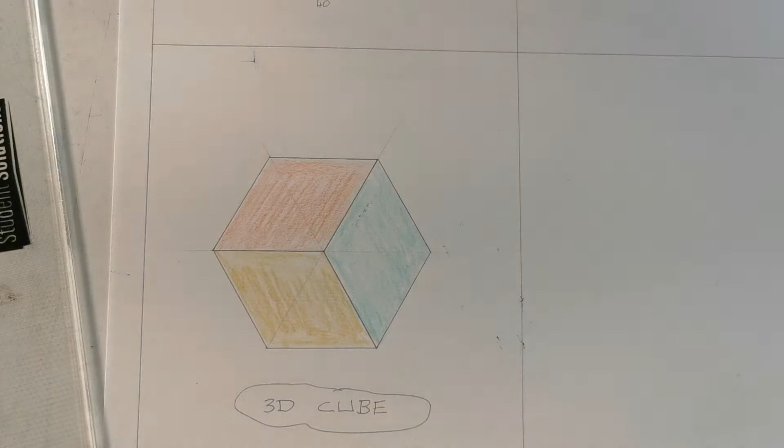So there we have a 3D cube, which is drawn there, starting off with a hexagon. Now that's just really a bit of fun. Okay. So that there is a 3D cube. So up here, our first one there was just a normal hexagon.

Now what I'm going to look at next, I'll just move on here to the middle grid on top, but it doesn't really matter which one you put these on. I'm going to look at drawing what's called a hexagon on a point. So again, I'm going to go with 10, 20, 30, 40. So we're starting off with a V. Now I just did one measurement again.

So vertical, vertical, 30-degree angle here, and a 30-degree angle then back through the center here, and 30 degrees and 30 degrees. So again, I only measured one time, because you don't want to have to be measuring every single side. If you know your angles, you only need to put the measurement on once, and you can drive on there with that then. So here is what's called a hexagon on a point. The first one we drew was on the flat.

Now with this one, I'm going to just heavy in all of the edges here, and I'm going to grab my colouring pencil there and just highlight a few little bits of geometry that's on this here now. So you can see there that there is 6 equilateral triangles, so I'm just going to take one and highlight it here, and we'll just examine the geometry on that.

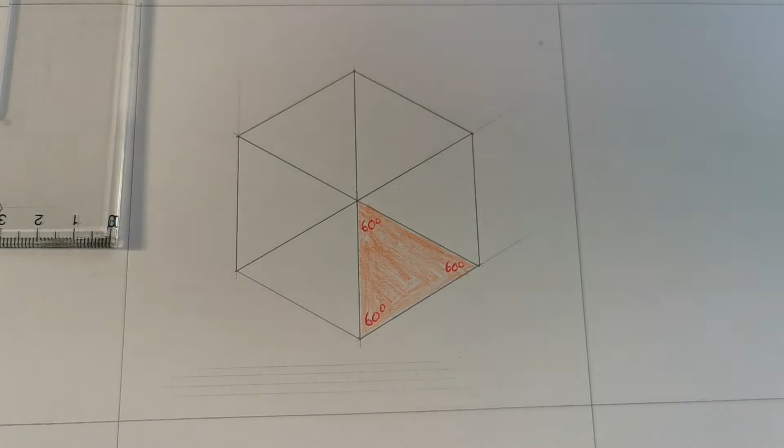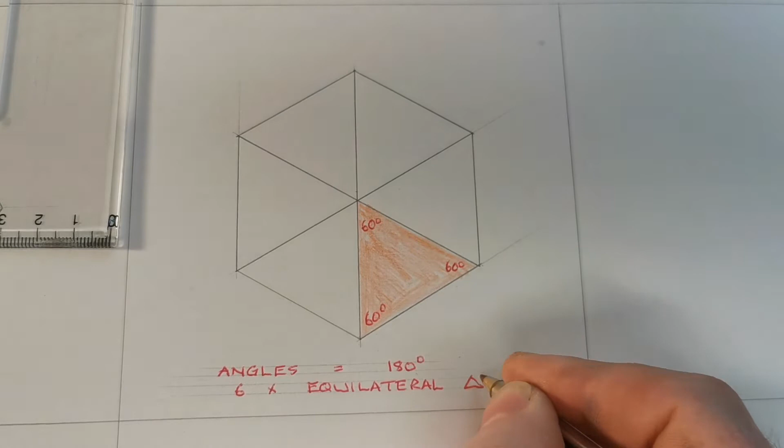So the angles are equal to 180 degrees. Okay, so 60, 60, 60, and you can say there is 6 equilateral triangles. We'll just put the symbol for triangles. Okay, so there's 1, 2, 3, 4, 5, and 6.

Okay, so that's just looking at the geometry of that, and if you wanted to, you could just put a dotted line coming out here, and we'll just highlight that this angle here is 30 degrees. And just to make a nice tidy job of it, I'll use my compass here to put in that compass arc. So that's a 30-degree angle there.

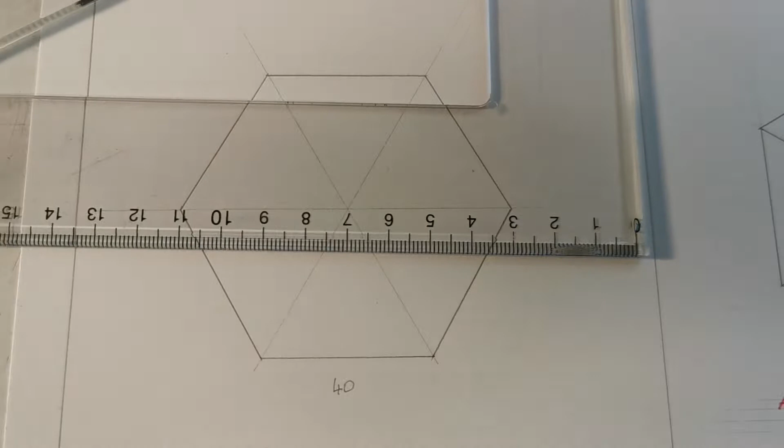Now actually comparing that now to the previous one, I'll just zoom back over here for a second. I'm going to add that addition to it now. I'm going to put a dotted line out here. And just pop in my arc. Whoa. And that there is a 60-degree angle. Okay, so that's a 60-degree angle there to the horizontal. Okay, so that's 3 of them done.

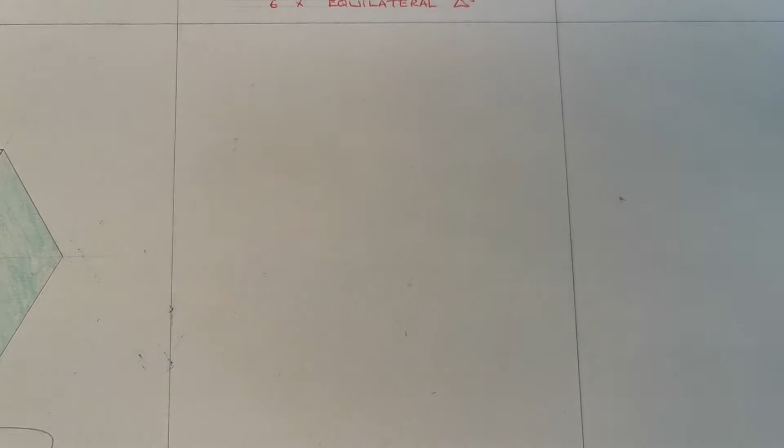Now I'm going next to just reposition the camera here, and I'm going to focus on this box down at the bottom here next. And what I'm going to do here is just draw a random sized circle. I'll draw it heavy enough that you can see it. I would draw it a little bit lighter if we weren't using the camera.

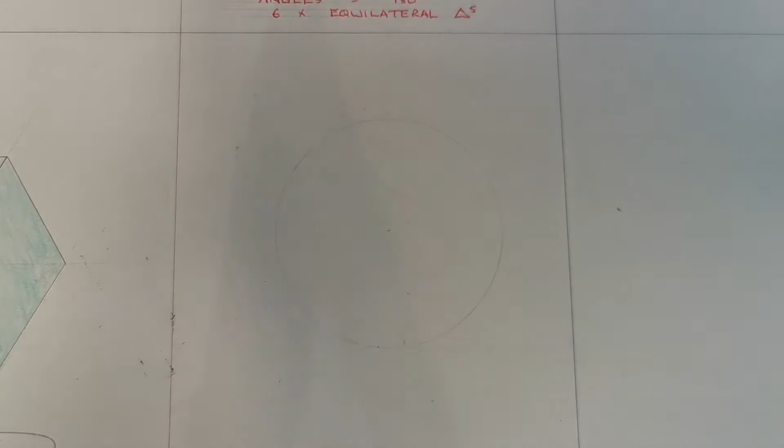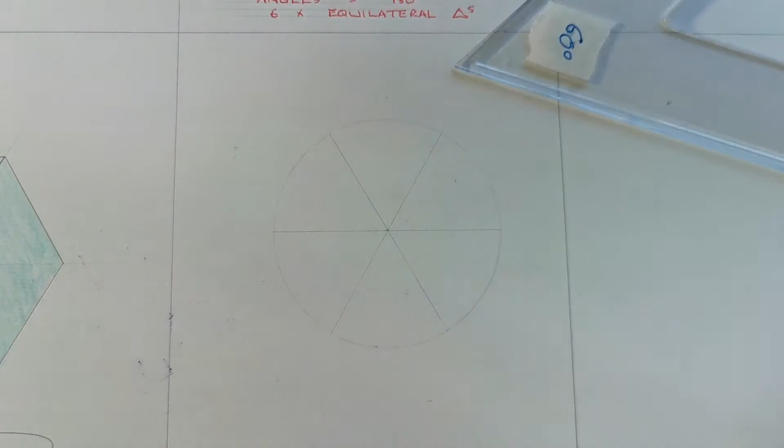So there's our circle. Now what I want to look at here is drawing an inscribed hexagon inside in that. So what I'm going to start off doing there is I'm going to draw a horizontal and my X using the 60 degrees set square. And there we have all the edges that I need. So we've got 2 horizontals, 60, and I'll just flip that the other way. Okay, so that there is an inscribed hexagon.

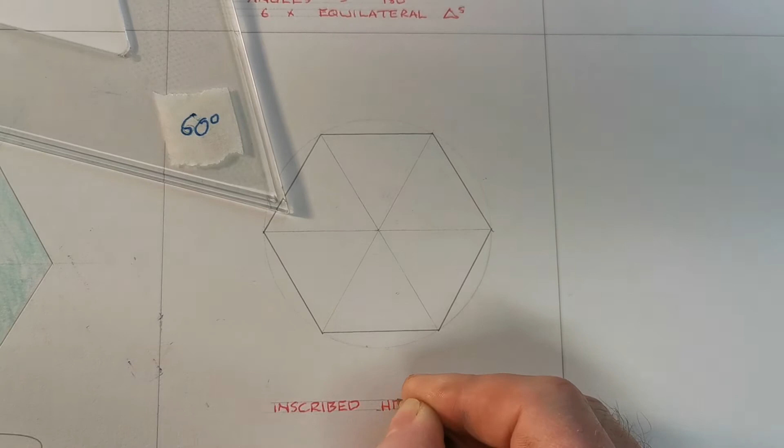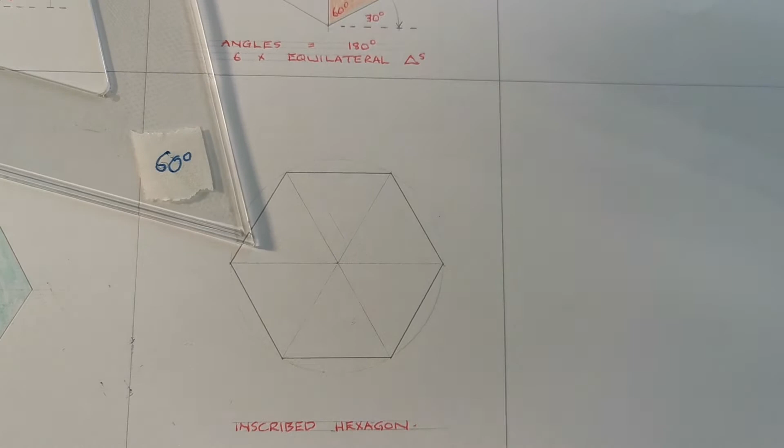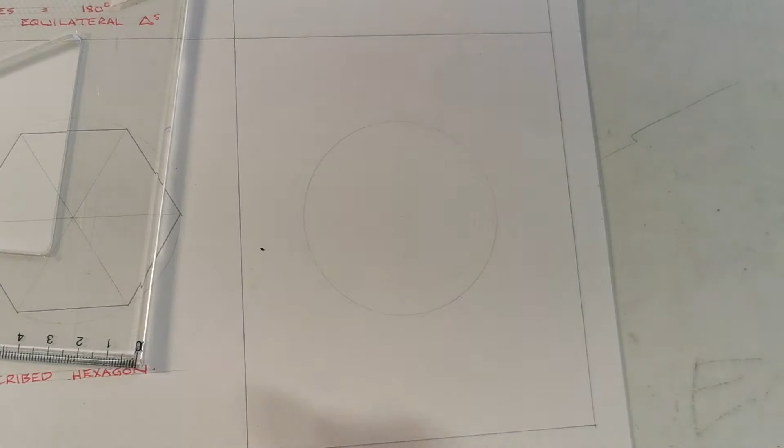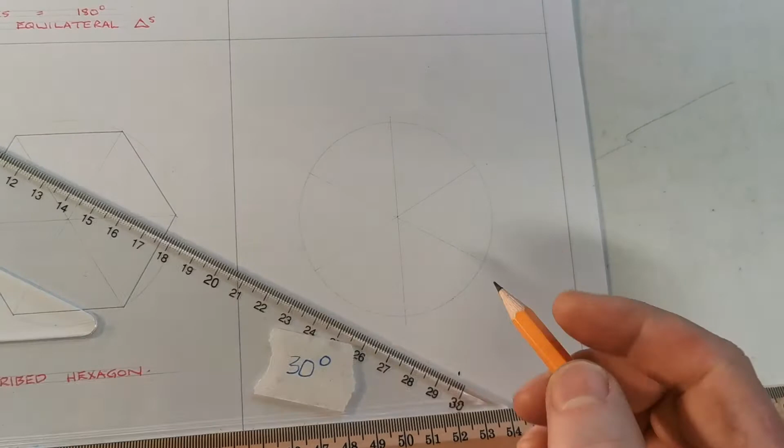Now, next box there, so I'm going to just come to the box beside it here, and we're going to do pretty much the same thing. Grab a compass, draw a circle. Now the only thing that's different, the last time we started with a horizontal, this time I'm starting with a vertical line. And I'm going 30 degrees and 30 degrees all through the center, and that there then is my inscribed hexagon standing on the point.

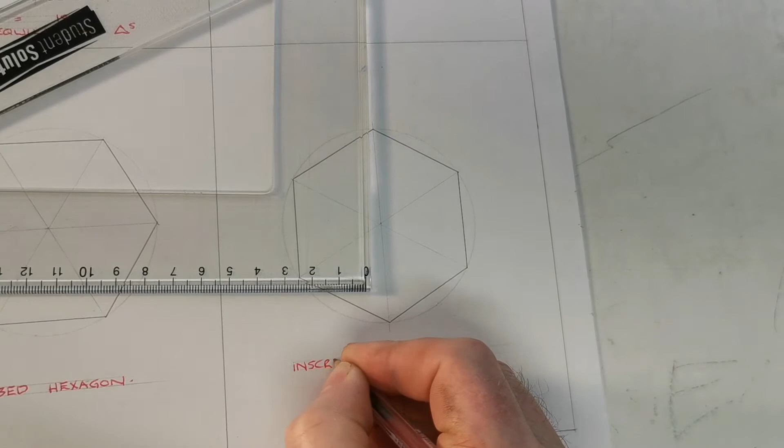So again, you can see these are 30-degree angles to the horizontal, and the sides are vertical. And again, we'll stick on some white lines here, and that there is an inscribed hexagon, what's called on the point.

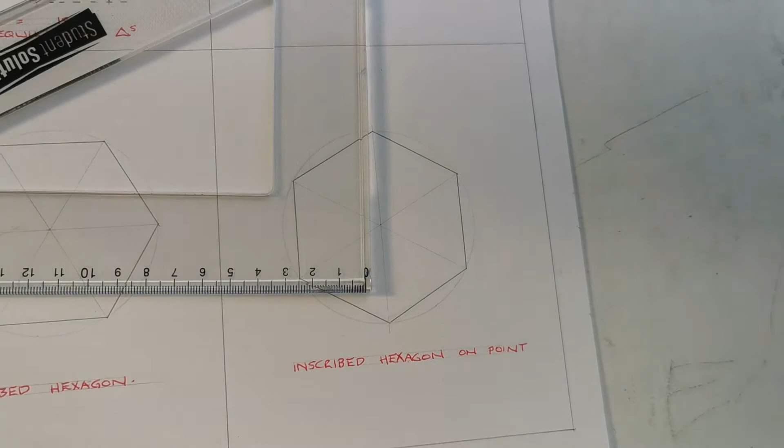And just go back to the previous one there for a second. I'm going to add an extra little part to that. That's an inscribed hexagon, what's called on the flat.

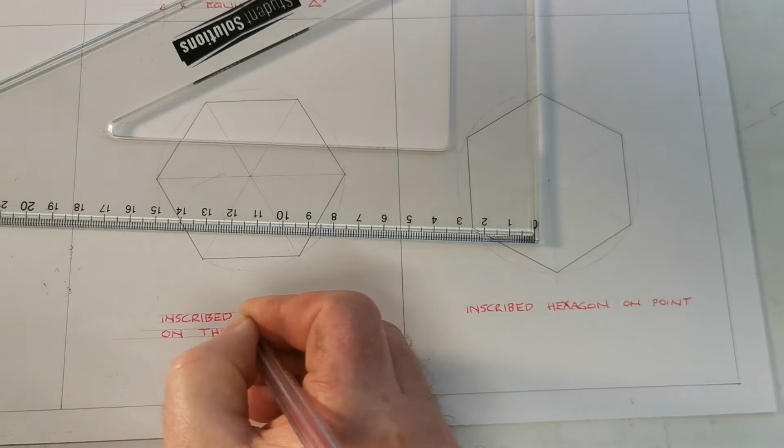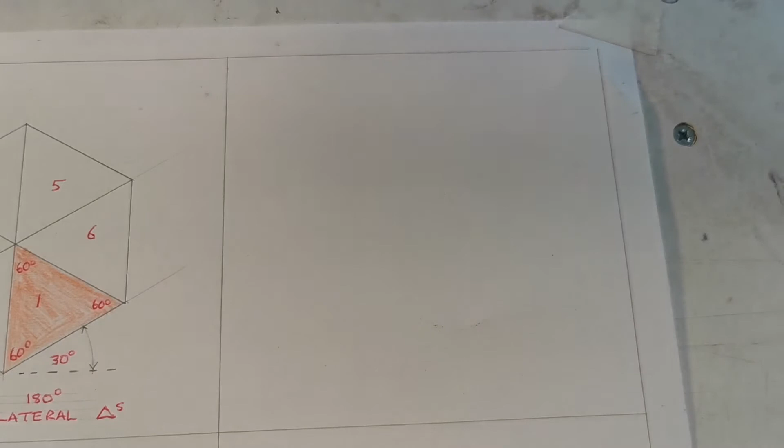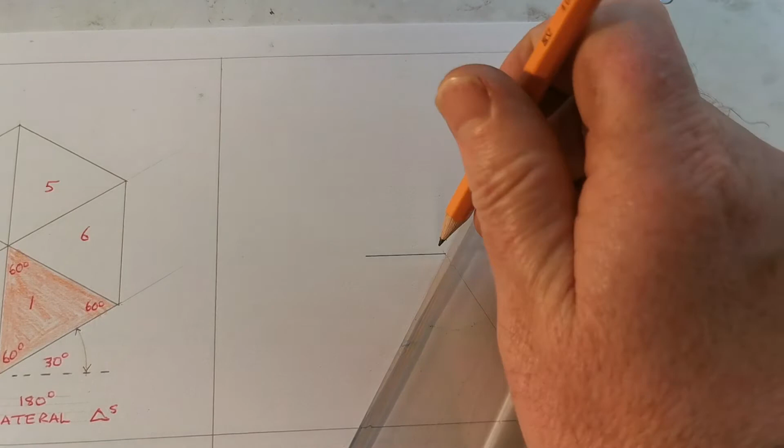Finally there then, just go up to this last one here, and what I'm going to do here now is just draw a small enough, maybe 25, hexagon there, and I'm going to go 60. So what size are we going to make this? So I said there that that was 25.

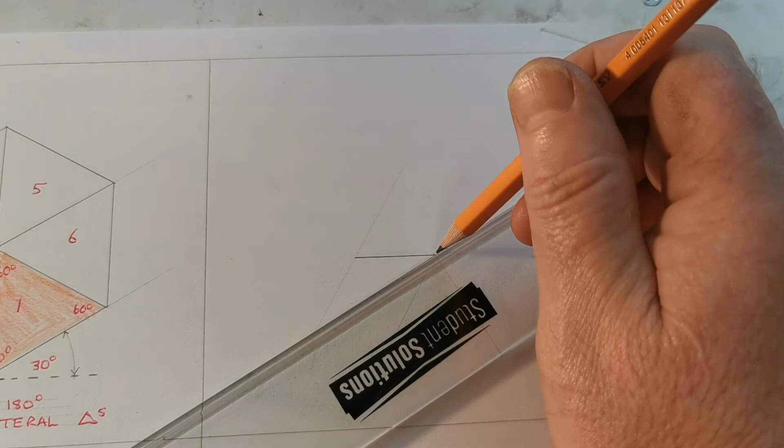So I'm just gonna put a 30-degree line here. And this is my first hexagon. Horizontal. Now I'm just lining that up really light, so I'm just trying to keep the internal work on this one light. So here is

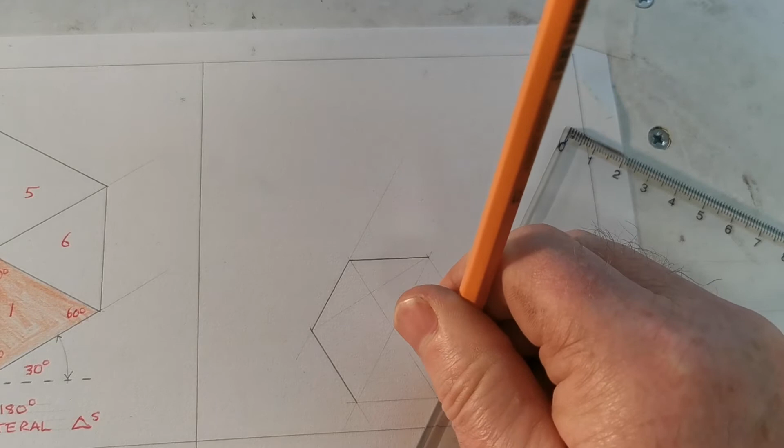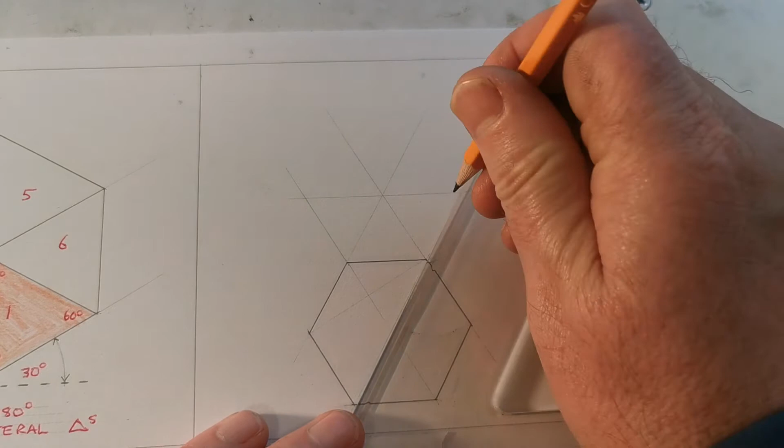a smaller hexagon, and what I'm going to do there now is I'm going to put another hexagon attached onto it. So here's my X through the center, horizontal, so this is basically what we did in the first video.

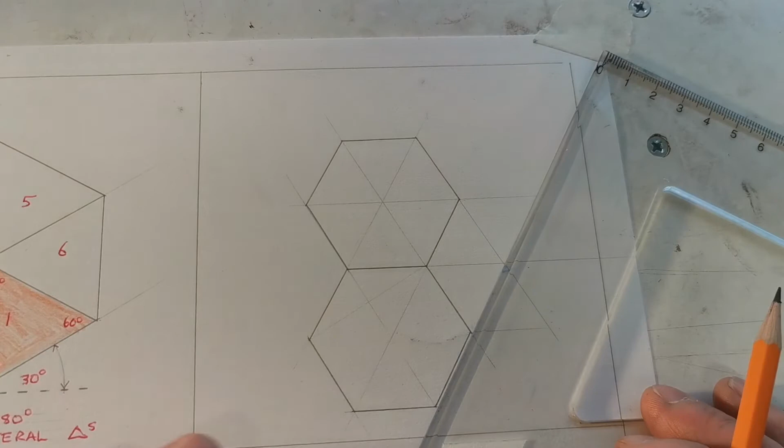So we're just going to do what's called a tessellation, or a repeating pattern. So I'll just come down at 60 here, nice and light, and up at 60. So 3 will do. Okay, so there we have, I'll just put a heading on this there, I'll stick it on the top.

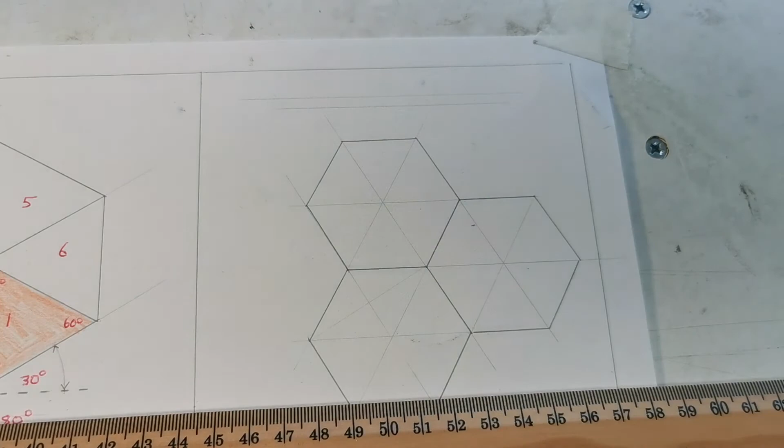Now, so guys, this is a tessellation, which is a repeating pattern. You often see it on tiles or on tarpaulin on the floors or whatever. So it's T-E-S-S.

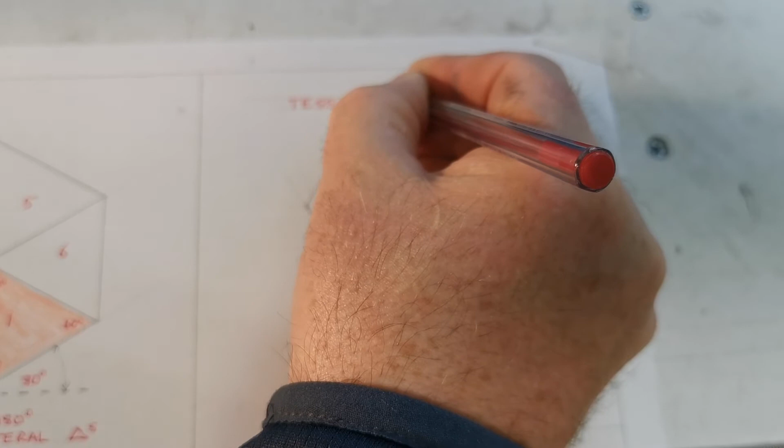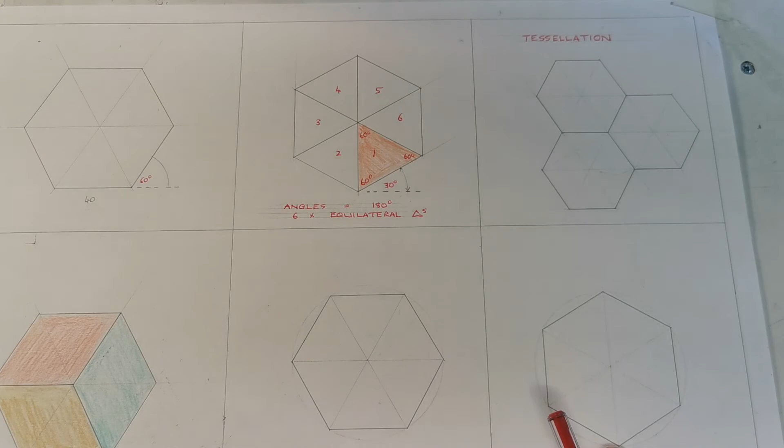Okay, so there we have, I'll just zoom back here, a quick sheet there. We've got our tessellation, inscribed on the point, inscribed on the flat. We've got our 3D cube. We've looked at the geometry there of our 60-degree angles, and finally there, I'm going to come back to this one again that we did first.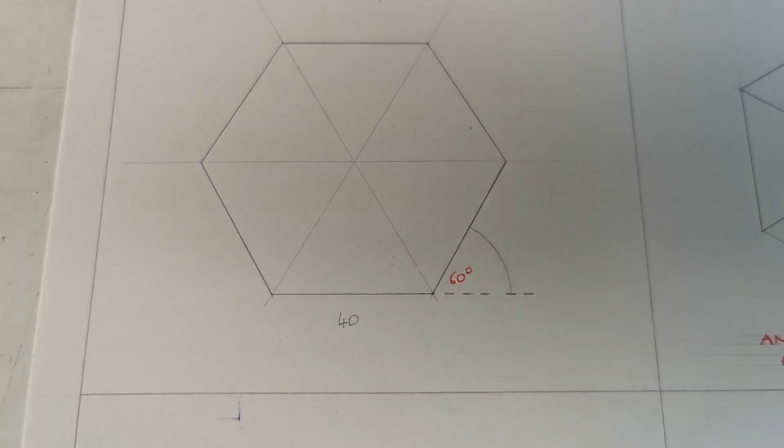If you want to just practice a little tiny bit more than onto that, what you could do there is, that's 40. If I just go 10 and 20 and 30, just zoom out there a little bit. So we're going to just do like a spider web. Now this is good practice for your use of the instruments, as they call it.

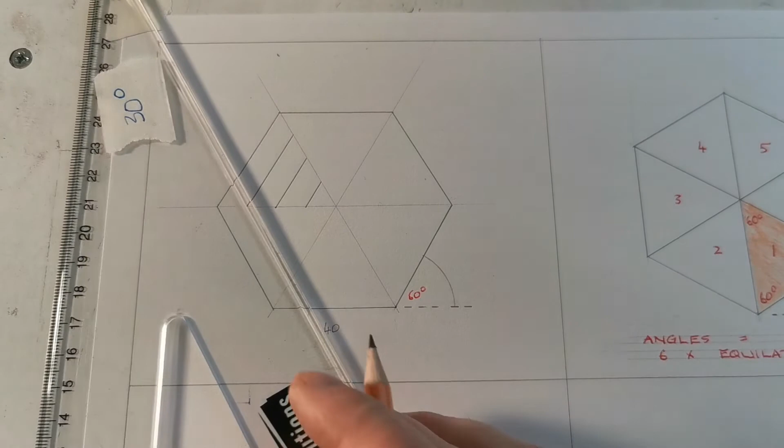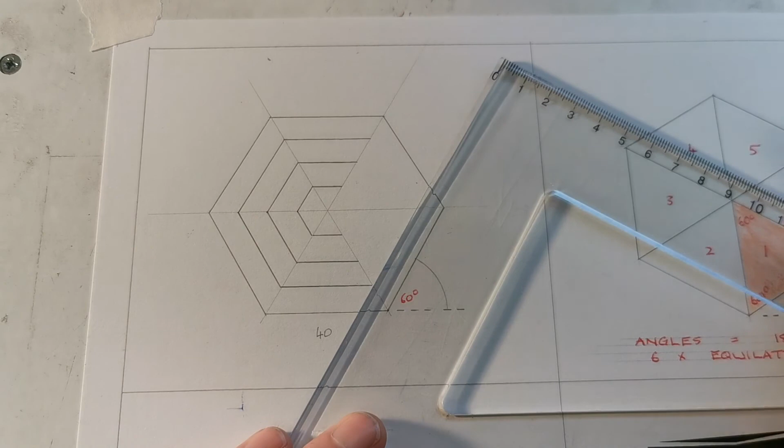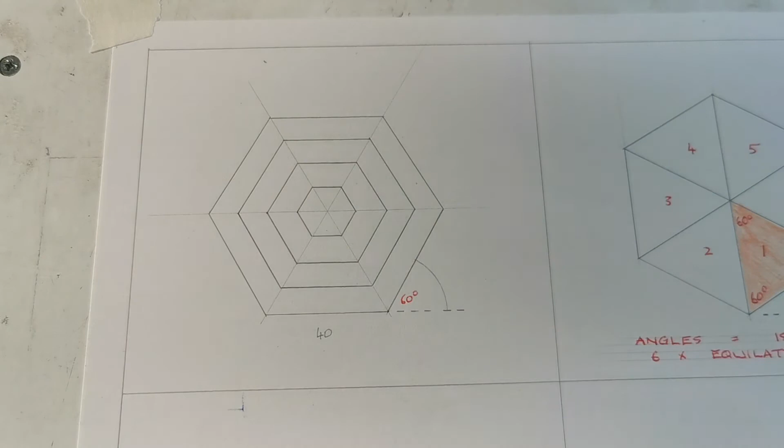So these are all parallel lines. Now lots of horizontals. Now it's so important to have a sharp pencil, and ideally a 3H is what I'm using here. So you can see what's going to happen here in a minute. And if you're accurate, all of these points should just join exactly. Okay. So just call this one a web.

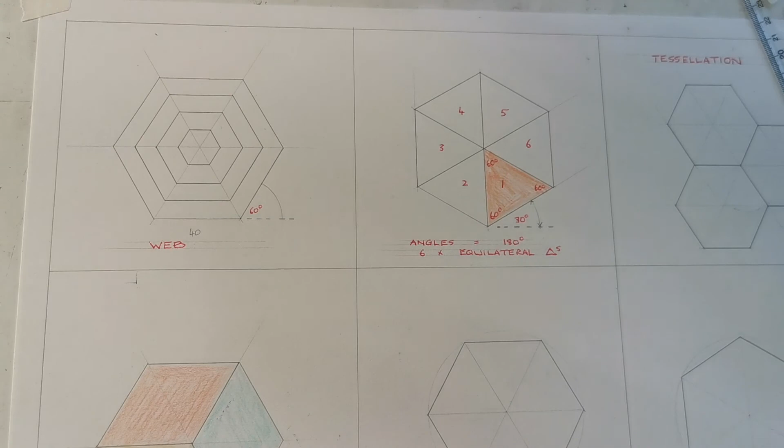Okay, so for first years or second years, that's a nice sheet there to practice and get to grips with hexagons. So yeah, I hope you enjoy that.